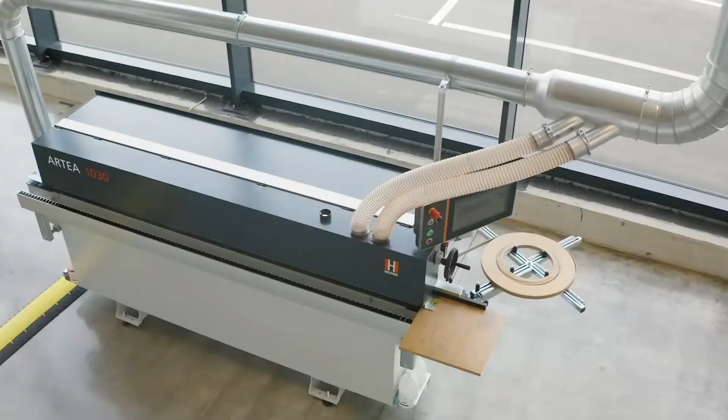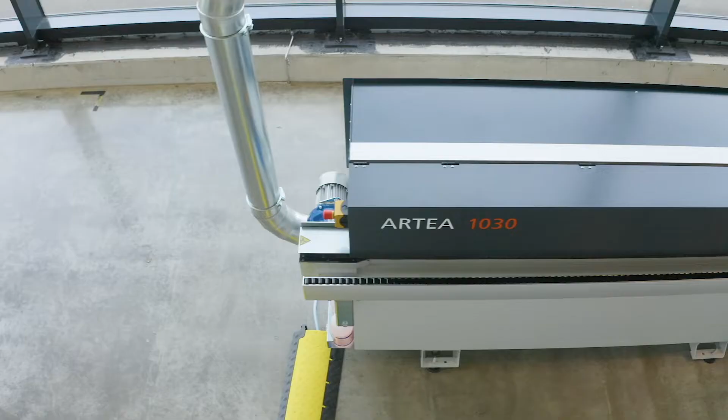Compact, smart, and with zero joint as standard. This is the basic idea behind the entire Artea series. With its compact design, the Artea series offers everything around a professional edge bander.

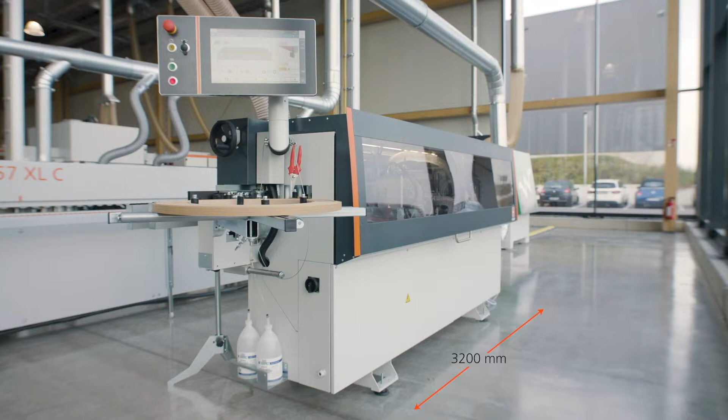Two models are available: the Artea 1020 without corner copying unit with an overall length of 3.2 meters, and the Artea 1030 with an overall length of 3.7 meters.

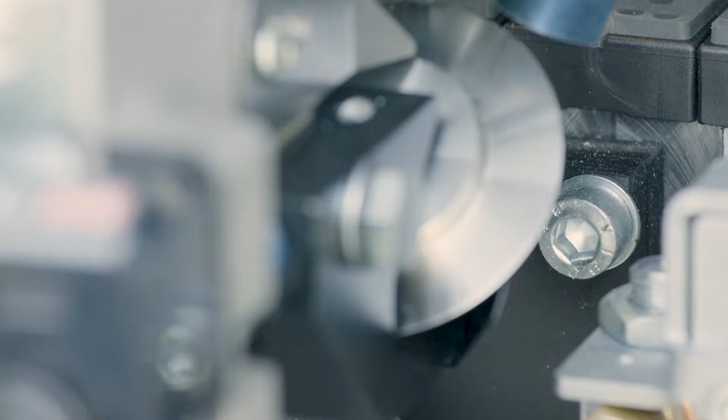Completely equipped from the joining unit through all necessary machining operations to the finish with scraper, surface scraper, buffing and spraying equipment.

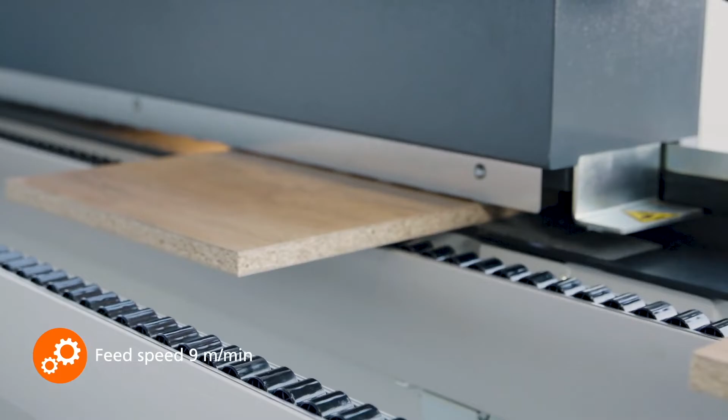With a fixed feed rate of 9 meters per minute, edge thicknesses from 0.5 to 5 millimeters, as well as panel thicknesses from 8 to 50 millimeters, it covers a wide range of applications.

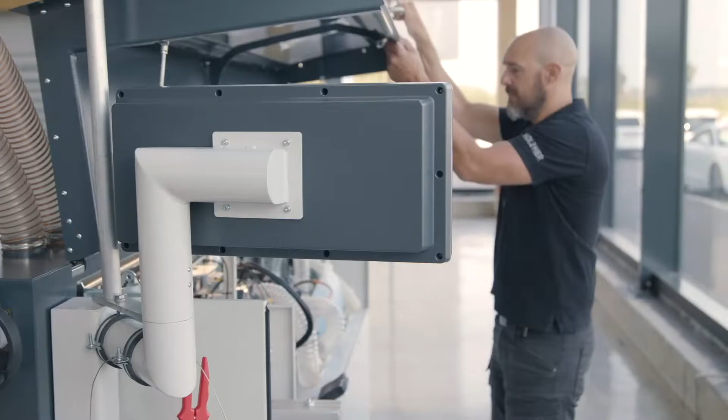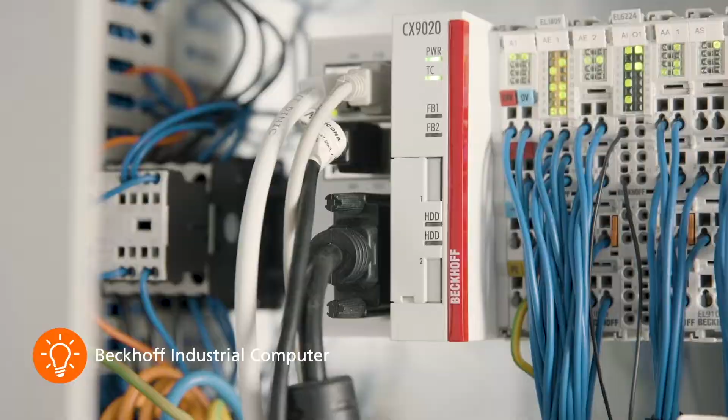The Artea features a large 15.6-inch touchscreen control panel. Rotatable, it allows ergonomic operation in any position. Inside works a state-of-the-art Beckhoff industrial computer, specially optimized for the needs of our edge banding machines.

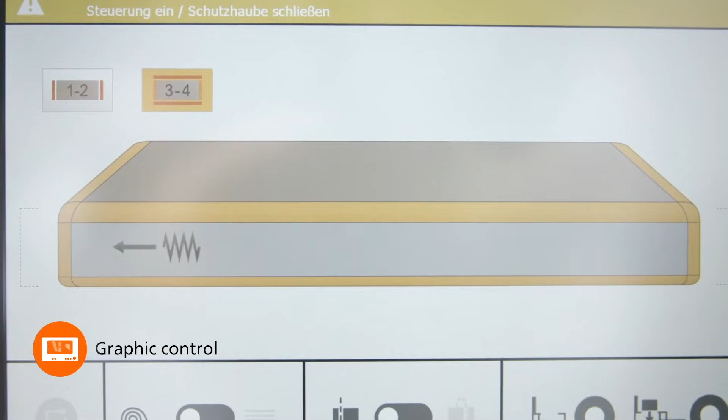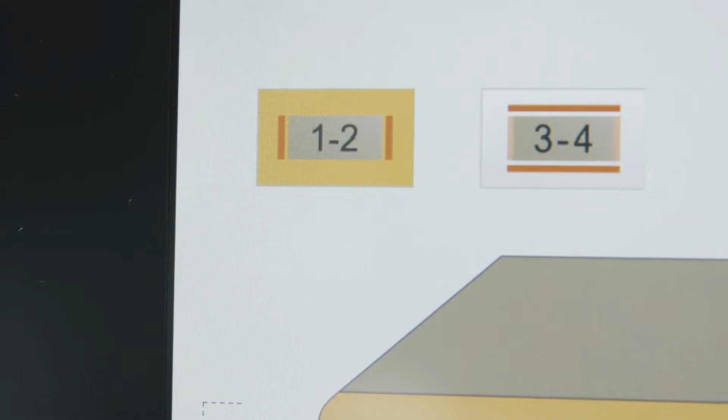The new operating concept of the Artea with its graphic control will inspire you with its simplicity and intuitive operation. For example, machining operations can be selected or deselected via the workpiece graphic by simply touching the touchscreen.

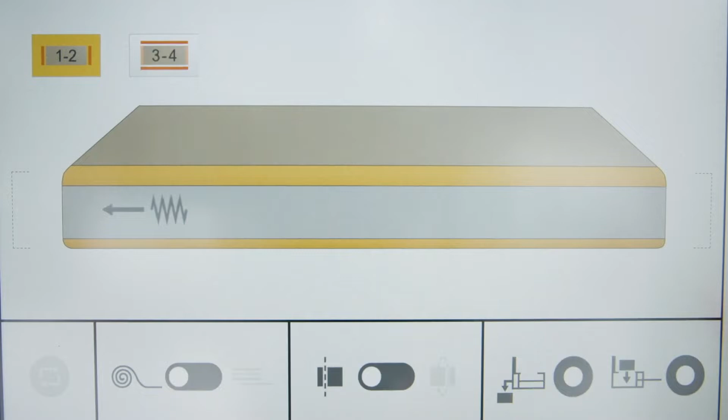The 1, 2 and 3, 4 buttons allow quick changeover between longitudinal edge machining 1, 2, or machining with corner copying unit 3, 4 for the third and fourth edge on a workpiece.

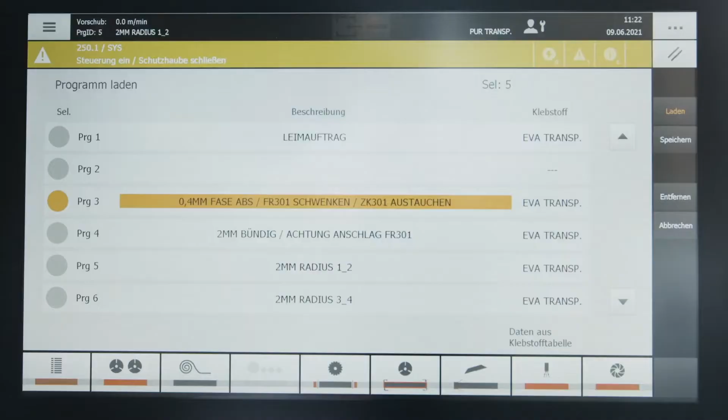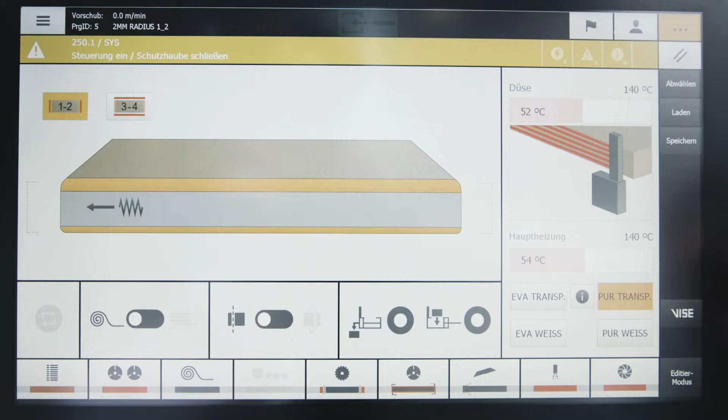An extensive program memory with the complete recording of all operating data as well as service messages in plain text are standard. Even the consumption of adhesive cartridges is recorded by the control system. An individual user administration with password protection and individual authorizations can be set up for your needs.

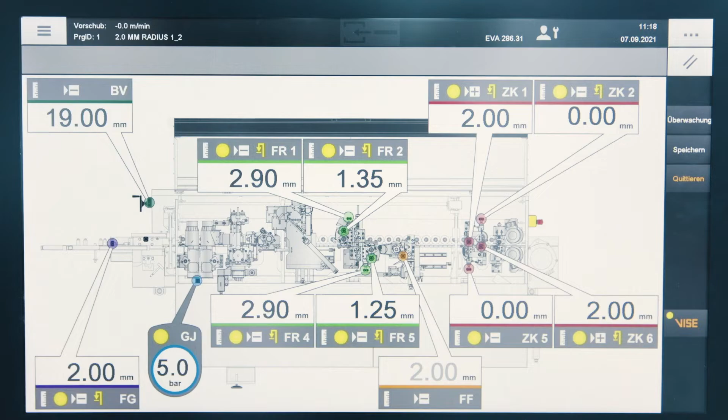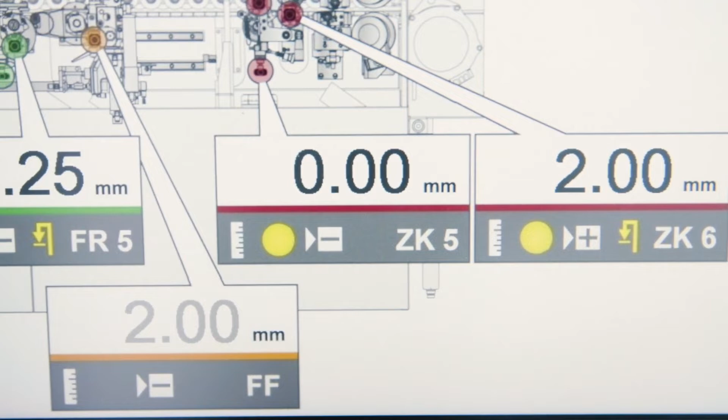VI.SE stands for Visual Setting System and is used for intelligent visual support of the machine operator. VI.SE provides a digital logbook of all setting values for the digital counters and pressure gauges to set up the machine quickly and safely. In this way, VI.SE helps you avoid setting errors and reduce test pieces to a minimum. The VI.SE system is unique in this class, and you will never want to do without it on your Artea machine.

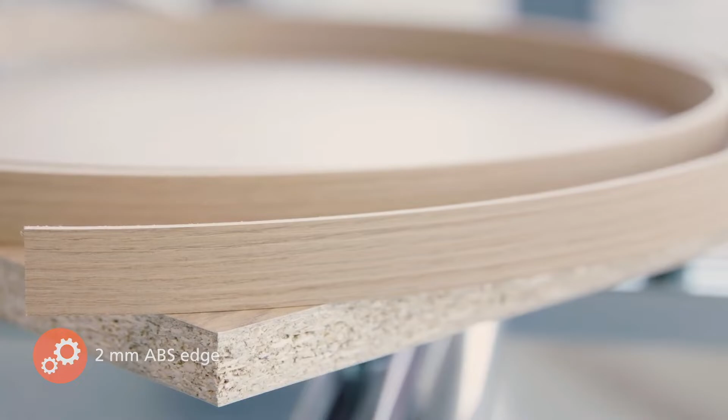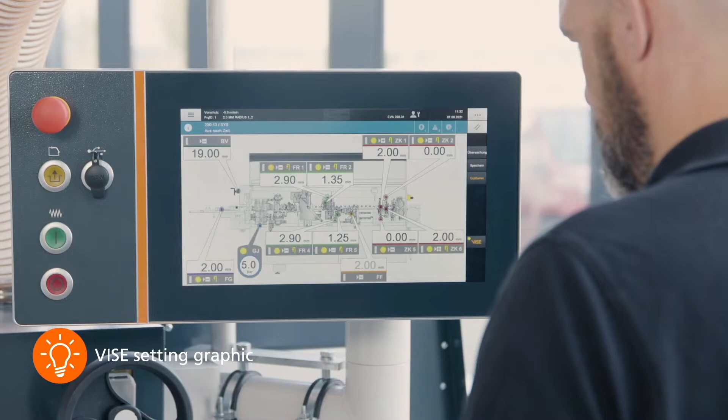Here is an example with a 2mm plastic edge and complete machining. After program selection, the setting graphic can be loaded via the VISE button. The setting values are very easy to read via the large 15.6-inch touchscreen. Only the values marked in yellow must be adjusted on the machine.

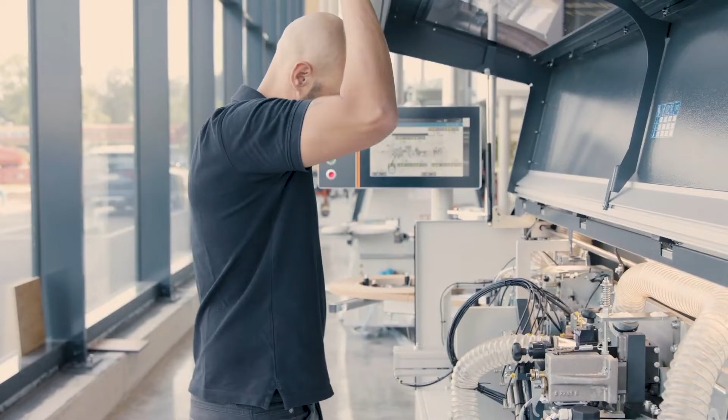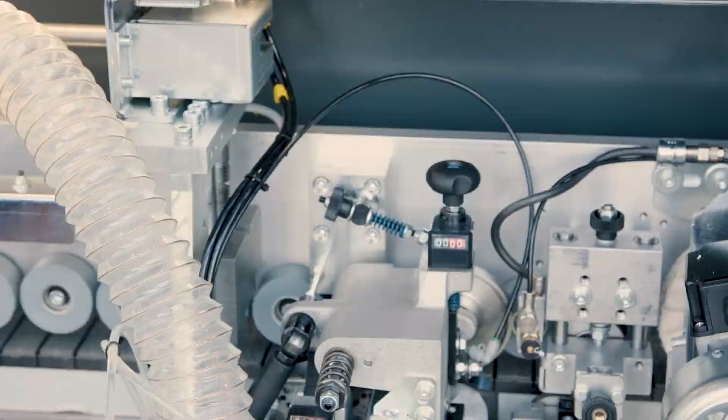Now the individual digital counters and pressure gauges are set to the numbers shown in the graphic and the machine is completely set up. After that, the acknowledgement takes place and the machine releases the machining for production. There is no easier and more professional way to set up such a complex manual machine. Regardless of the skill and experience of your operators, you will always achieve consistent results of excellent quality.

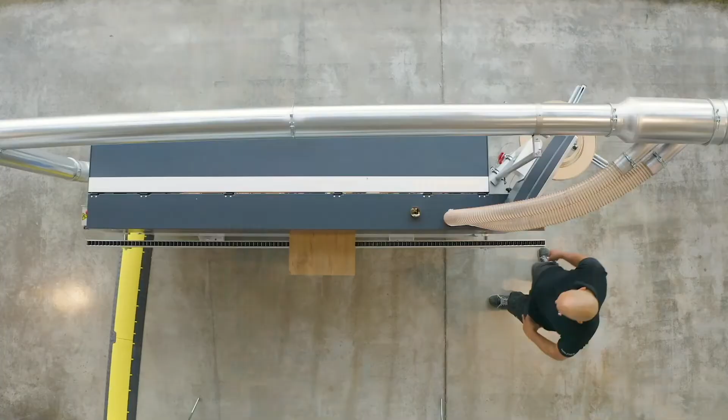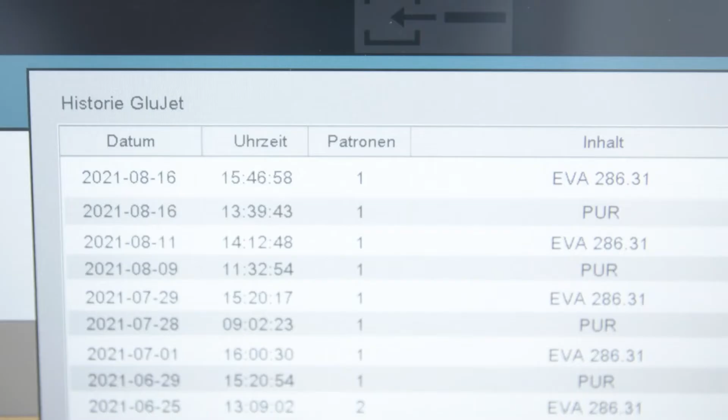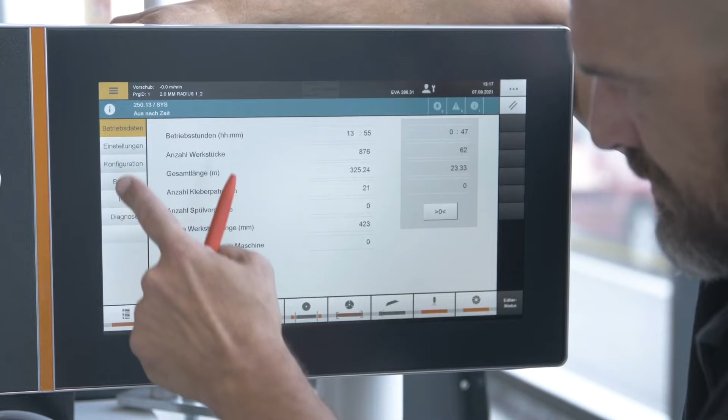Another highlight is the newly developed glue library. With its help, up to 4 different adhesive types with their different properties can be managed. Switching between EVA and PUR adhesives is thus child's play, and all important parameters such as processing temperature, pressure values, and also the different adhesive viscosities are taken into account in the respective profile.

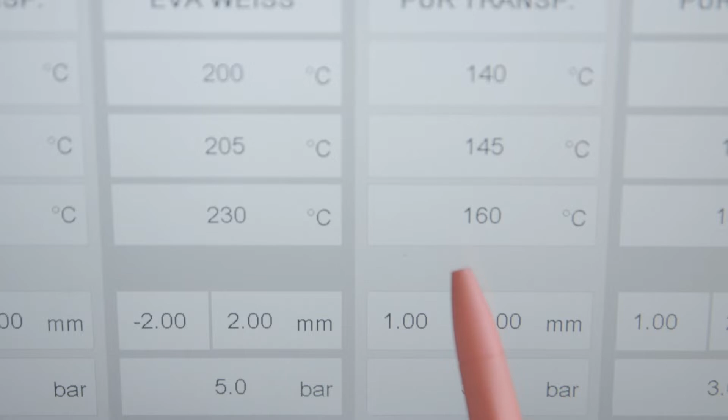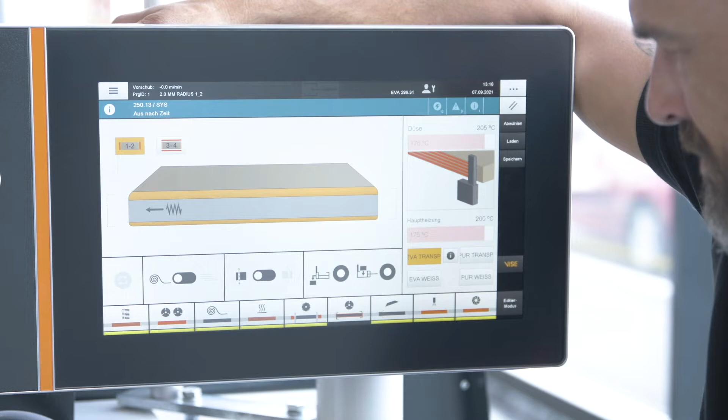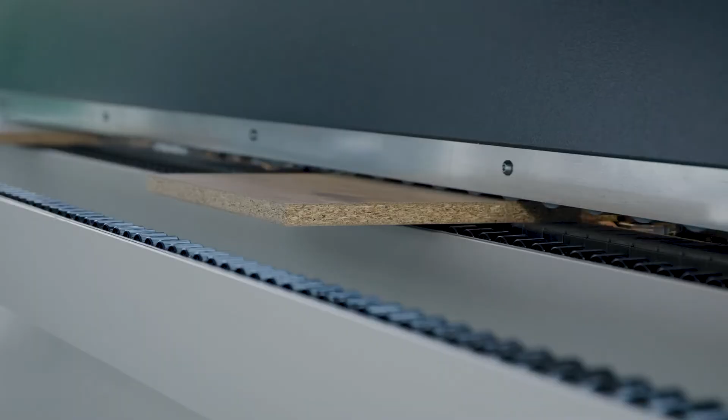The correct pressure value for the GluJet adhesive system, which also controls our optimum adhesive quality, is automatically transferred to the VI.SE system depending on the adhesive type. The on and off points of the draw frame control are also optimally adjusted depending on the adhesive viscosity. This means that all important adhesive types are available at all times with optimum setting values depending on the application.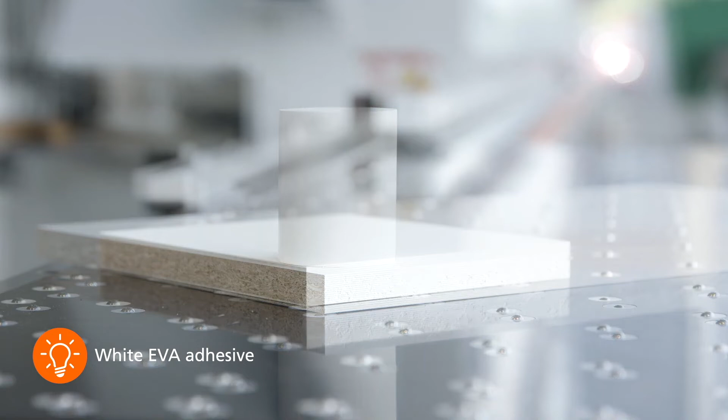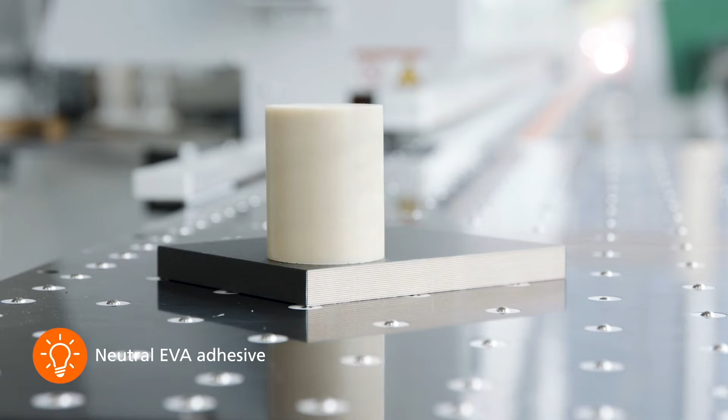White EVA adhesive for your cost-effective light decors. White PUR adhesive for your waterproof light-colored furniture. Neutral EVA adhesive for darker decors. And finally, transparent PUR adhesive, for example for dark textured panels. No more compromise for your quality, and all with zero joint.

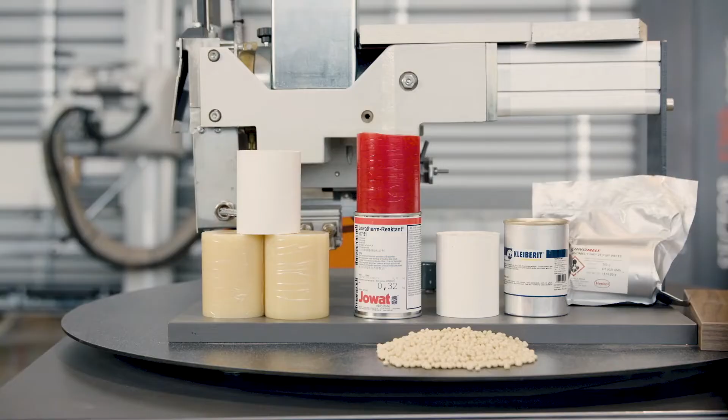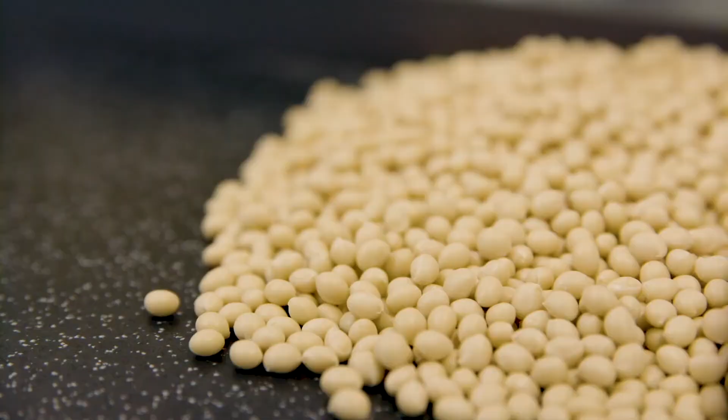The heart of the Artea is of course our unique GluJet adhesive application system. With GluJet, you can process standard adhesive cartridges or granulated adhesive as standard with EVA or waterproof polyurethane adhesives as required, in an unrivaled quality with zero joint.

The machine is ready for operation in just 3 minutes and cools down just as quickly. With its short heat-up time and low energy consumption, the Artea is a pioneer in energy efficiency.

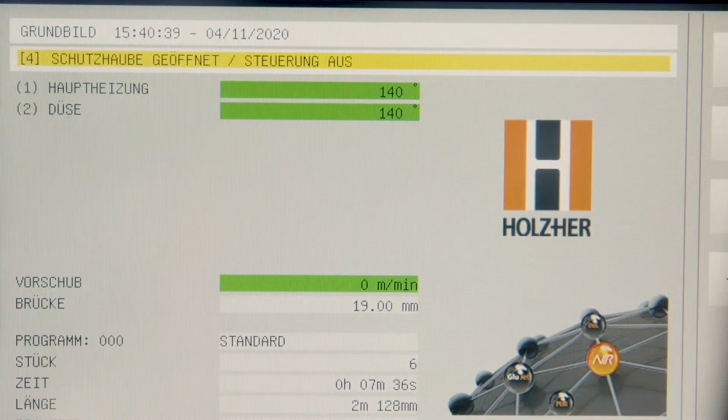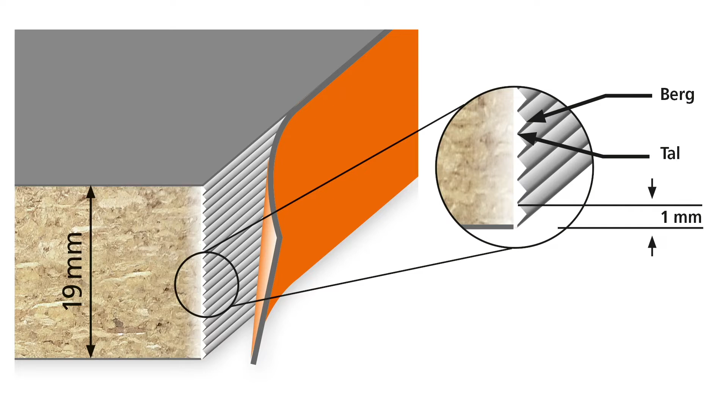With GluJet, the adhesive is pressed into the plate structure under high pressure. Thanks to the 90-degree doctor blade division in a 1mm grid, for example, on a 19mm plate, 19 adhesive strips are applied with high precision.

During subsequent pressing at the pressure unit, the adhesive can now spread from the mountain to the valley within the narrow surface without swelling at the top and bottom, thus creating a clean optical zero joint. At the same time, this patented process ensures a high-strength joint.

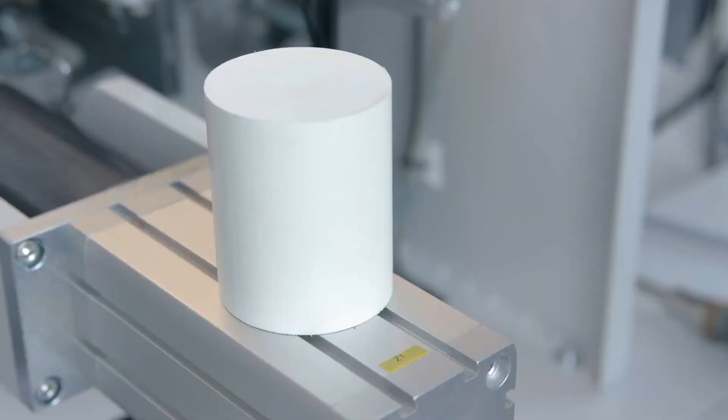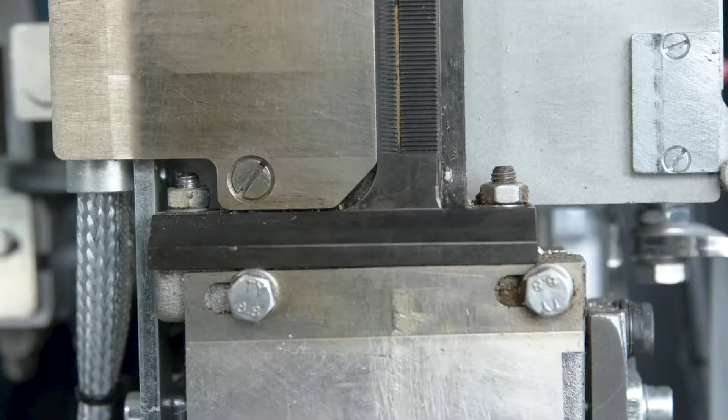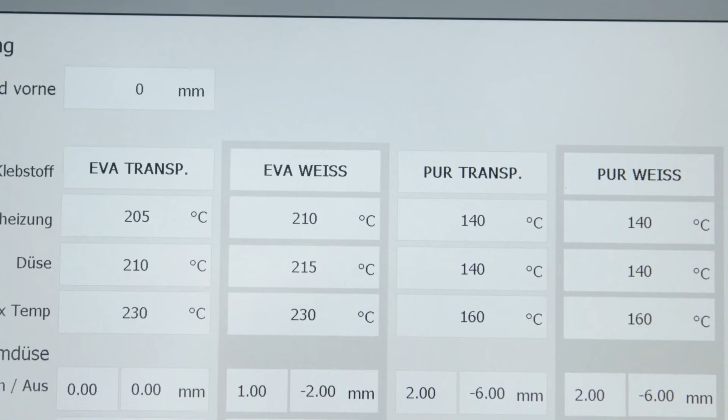With GluJet, adhesive changeover is simple, fast and clean. Thus, PUR adhesives, EVA adhesives or various coloured adhesives can be changed within a few minutes depending on the application. The rinsing process takes place via the rinsing hole integrated in the GluJet. The new adhesive is then poured in and rinsing continues until the new adhesive has displaced the previous adhesive.

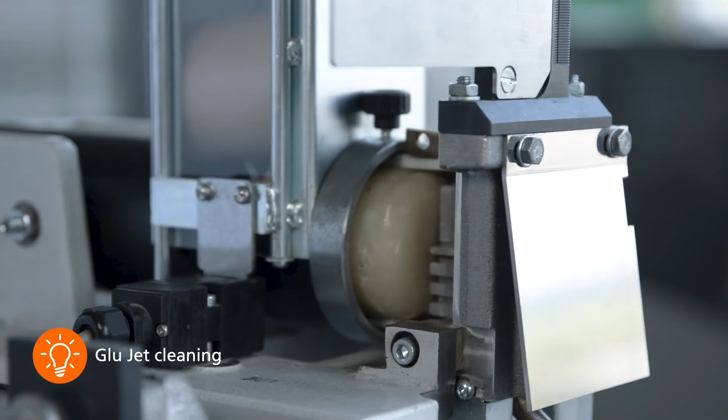The whole process works when changing from PUR to EVA or vice versa. Cleaning the system is child's play and takes only a few moments.

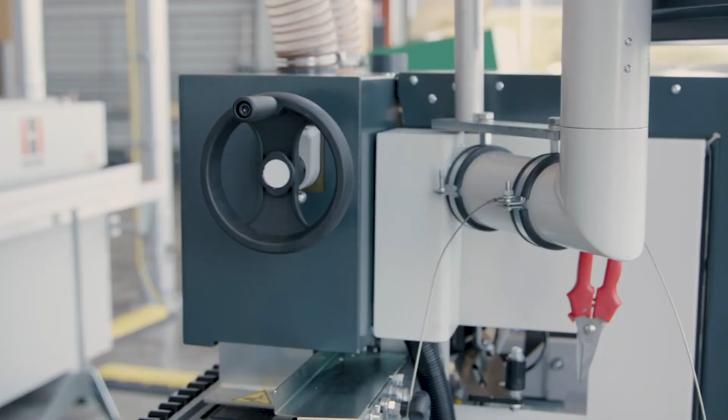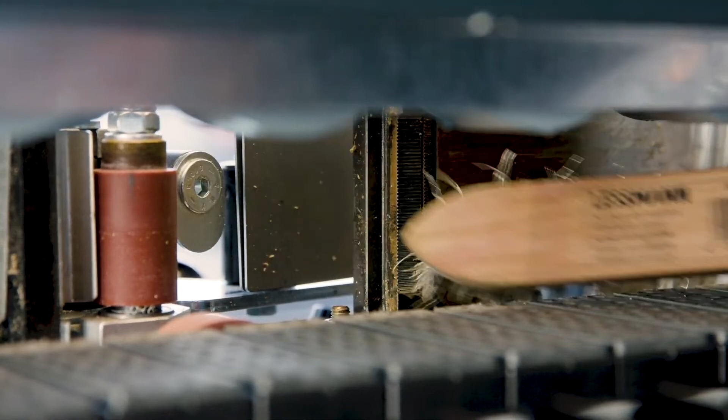When using EVA adhesives, the adhesive can remain in the system and only the adhesive application nozzle needs to be cleaned. The machine bridge is moved to the maximum height so that the GluJet nozzle is completely open and accessible. Adhesive residue is then loosened using a compressed air gun, and then the specially hardened nozzle is cleaned with a wire brush. Tip-top clean in just 1 minute.

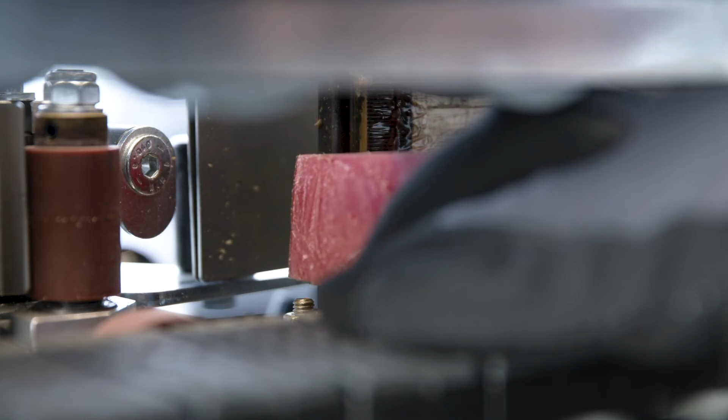PUR adhesive can remain in the adhesive station for up to 48 hours. After that, usually before the weekend, the complete system must be flushed and neutralized with the correct pressure, temperature and amount of cleaner. Special PUR cleaners are used to flush out the PUR and prevent further reaction of the PUR adhesive. Afterwards, the nozzle is cleaned again, as with the EVA adhesive, except that the nozzle is additionally sealed with PUR neutralizer. And again, everything is tip-top clean.

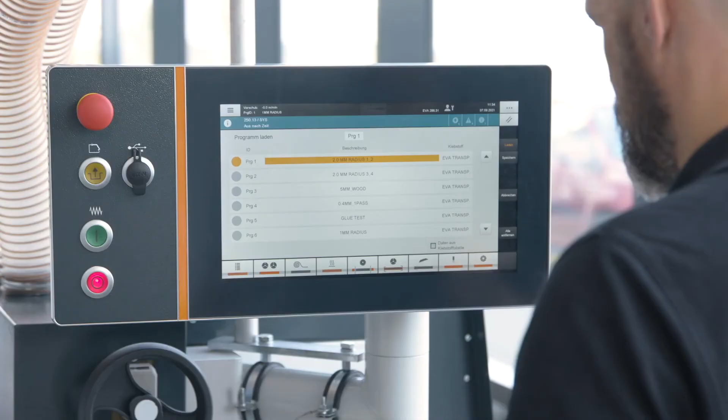Whether for thin edges, all common plastic edges, or solid wood edges, with the Artea you are always on the right side for a perfect result. The GluJet system makes you highly flexible, and you can always respond to your customers' wishes individually while remaining profitable. The make-ready support with VI.SE and the unique glue library support you in an unprecedented way.

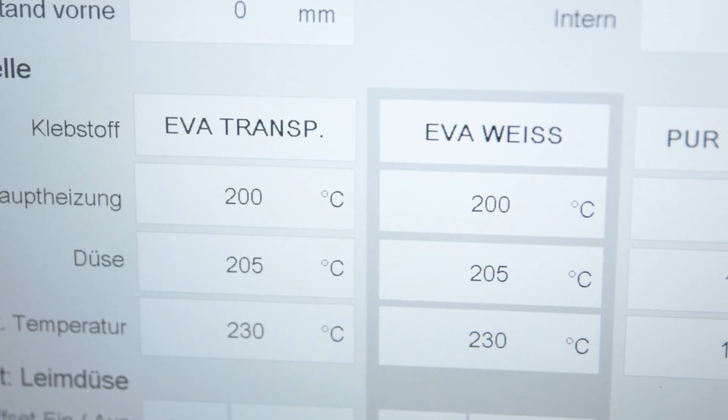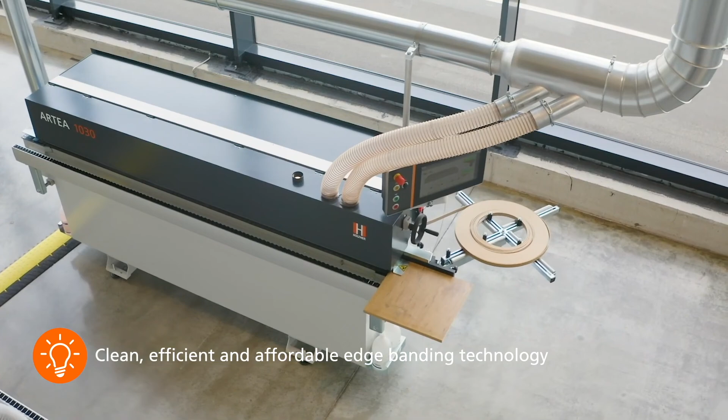The edge bander is critical to the high-quality look of your furniture. Don't live with compromises or encrusted adhesive melting pots any longer. Bring clean, efficient and affordable edge banding technology of the highest quality into your home with the Artea.